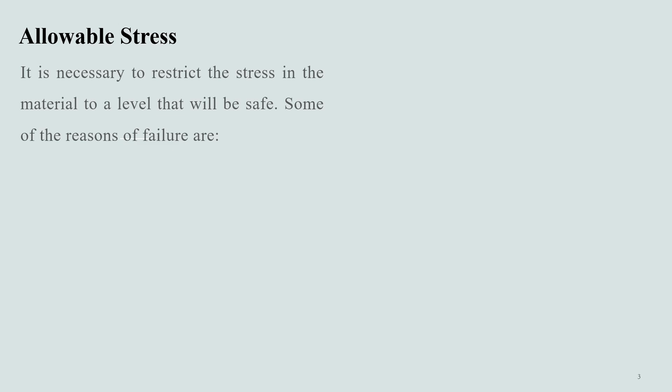There are many reasons for doing this. For example, one of the main reasons is fabrication errors. Most of the time, the fabricated or constructed member has a deviation in its measurements from the design measurements.

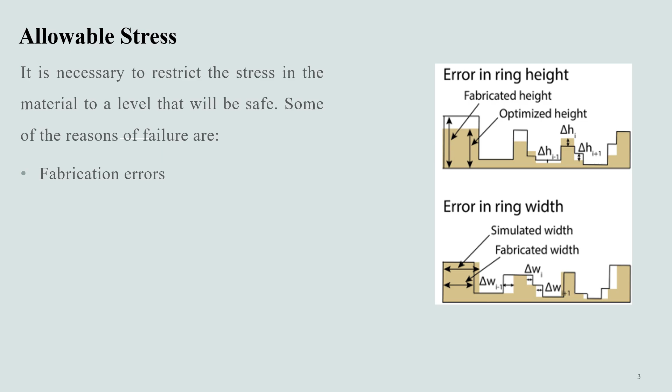Another reason for this is excessive loading. Obviously, we design for a particular load, but most of the time, the applied loading, especially on bridges or in road networks, is more than the load for which the structure has been designed. This is accounted for by using a factor of safety, which we will discuss in the coming slides.

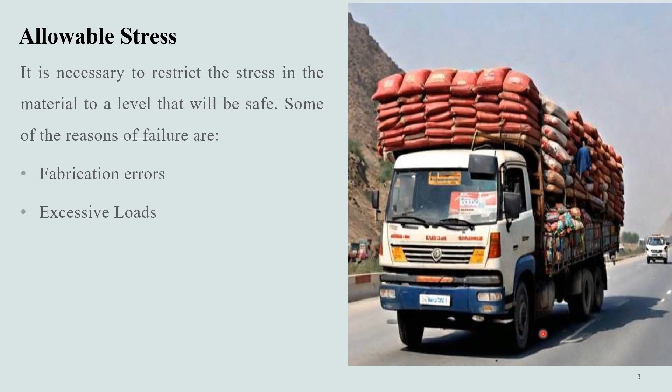Sometimes another reason to use this concept of allowable stresses is unanticipated loading. Any kind of impact, natural disasters such as floods, hurricanes, earthquakes, etc., can cause a huge amount of excessive loading than that for which the structure has already been designed.

Another main reason is the deterioration of structures due to weathering effects and the indigenous properties of concrete, which results in the loss of its strength and other mechanical properties.

One method of specifying the allowable load for a member is to use a number called the factor of safety. The factor of safety is the ratio of the failure load to the allowable load. The failure load is found from experimental testing of the material, and the factor of safety is selected based on experience, so that the above mentioned uncertainties are accounted for when the member is used under similar conditions of loading and geometry.

If the load applied to the member is linearly related to the stress developed within the member, as in the case of using normal stresses or shear stresses, then we can also express the factor of safety as the ratio of the normal failure stress to the normal allowable stress, or the ratio of the shear failure stress to the shear allowable stress.

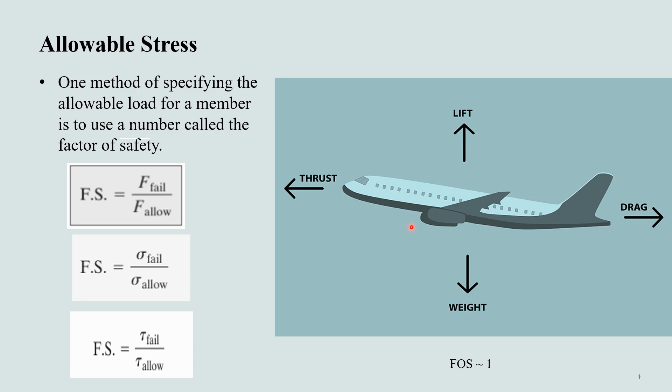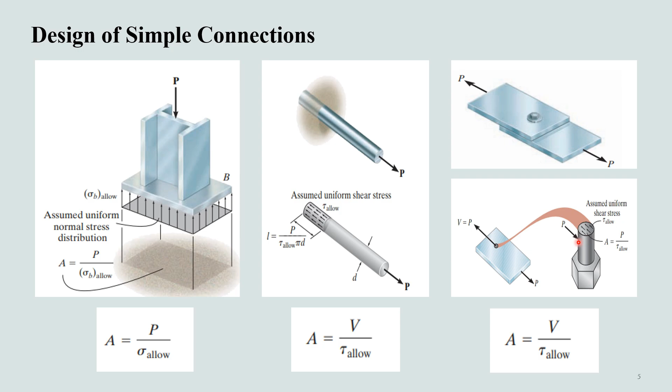When solving problems using the average normal and shear stress equations, careful consideration should first be made to choose the section over which the critical stress is acting. Once this section is determined, the member must then be designed to have a sufficient area at the section to resist the stress that acts on it.

This area is determined using the following steps. First, we need to determine the internal loading. For this, section the member through the area and draw a free body diagram of the segment of the member. The internal resultant force at the section is then determined using the equations of equilibrium.

After that, determine the required area using the equations which we have discussed in the previous slide, which are the normal load divided by the normal allowable stress, or the shear load divided by the shear allowable stress.

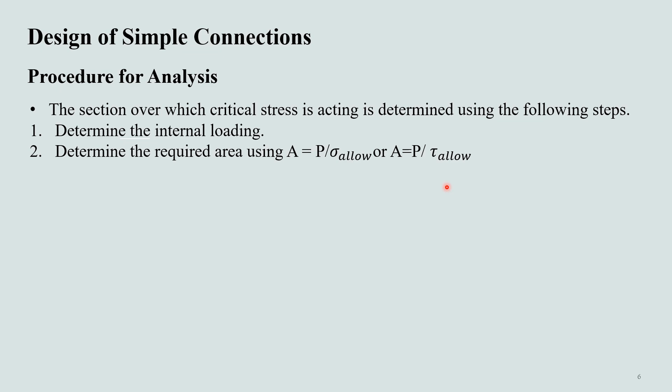This is our first example for the design of connections. In this example, we have been given an arm that is subjected to the loading shown in this figure. We have to determine the required diameter of the steel pin at C if the allowable shear stress for the steel is 8 ksi. So first, our first step should be to draw a free body diagram.

If we draw a free body diagram of this element, we find that we do not know how much force is being applied at this point, FAB, or the second support, and the first support is at C, which is actually an inclined support. Let me use a pen.

This was an inclined support here, but we know that using the principle of superposition, we can divide this inclined force into these two respective horizontal and vertical components. Why have we done so? Because it's usually much easier to work in this xy coordinate as compared to any kind of inclined coordinate.

Thus, we have this free body diagram, and using summation of forces and summation of moments, we are going to determine first the applied forces at point C, or the reaction forces at point C, to determine the diameter of the steel pin required to support this combination of forces.

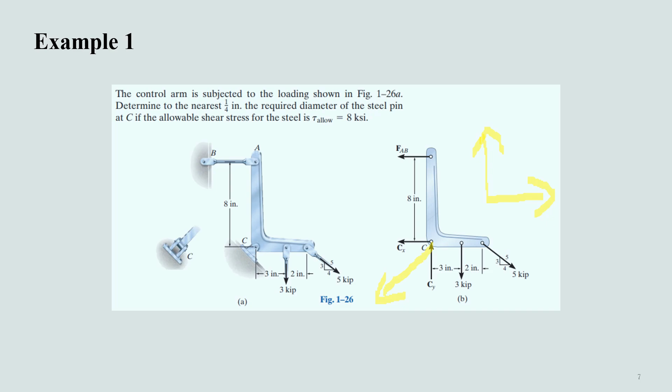Now, using this free body diagram, let's first apply the summation of moment at point C. If we apply summation of moment at point C, we can see that only the vertical component of this force of 5 kip will apply a moment at C. Along with this, a moment will be applied by force FAB and this force of 3 kip. Thus, taking anticlockwise moments as positive, the force FAB comes out as 3 kips.

Now, using the summation of forces in the x direction and the summation of forces in the y direction, we have determined the two unknown components of the force at point C, which come out as Cx equal to 1 kip and Cy equal to 6 kips. Using the concept of resultant forces, we can determine the resultant force at point C as 6.082 kips.

Now, if we closely look at this connection, we can determine that the pin at this location C is actually supported by two supports here. Thus, the total applied force of 6.082 kips is divided in half, and each face of this pin supports half of this applied force. Thus, if we need to determine the cross-sectional area, the applied force will be taken as half of this 6.082 kip.

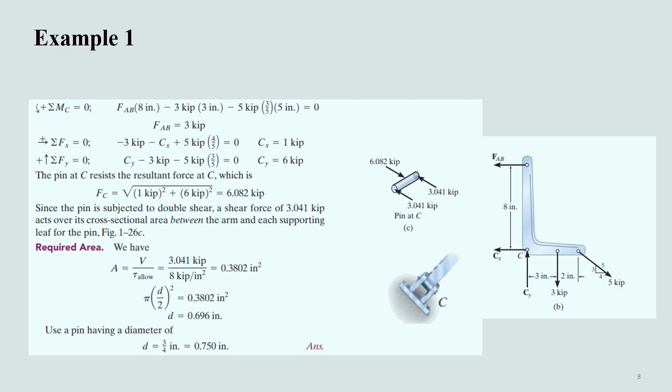If we take a closer look at this assembly, we can easily see that this rod is actually supporting a normal stress, and this disc will be subjected to shear stress. Thus, it's given to us that the allowable normal stress for the rod is 60 megapascal and the allowable shear stress for the disc is 35 megapascal.

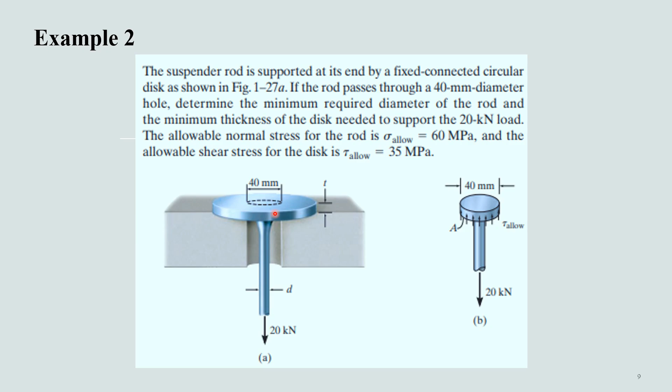In this case, determining the diameter of the rod is quite simple. We just need to use this equation in which we divide the applied load of 20 kN by the allowable normal stress in the rod, and equate it to this area here. Using this simple formulation we can determine the diameter of the rod.

However, in case of thickness of the disc, we closely need to evaluate the area that is being subjected to shear stress. Here we can see that this area can actually be determined by multiplying the thickness of the disc with the perimeter of the disc, because this small area where the shear stress is being shown is actually under the influence of the shear stress due to this applied force.

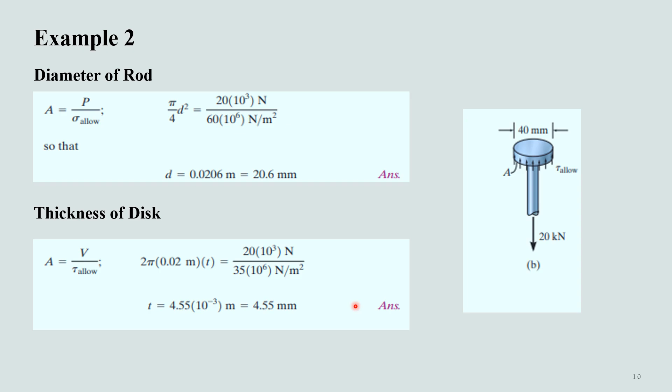Thus, the perimeter of the disc can be determined as 2 pi into radius, and to get the area of this region, we need to multiply it with the thickness, and equate it to the applied shear force divided by the allowable shear stress in the disc. Using this formulation, we have determined the required thickness of the disc, which comes out to be 4.55 millimeter.

We also need to keep in consideration that the pins at A and C are in single shear, not in double shear as in our previous example. We need to determine the largest load P that can be applied to the bar. This means first of all we need to consider the allowable stress for the aluminium, steel, and these pins based on their material as well as geometrical properties.

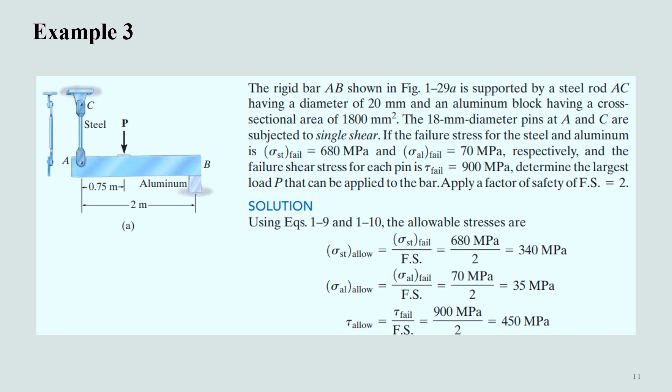So let's start our example. In the first step, we need to determine the allowable stress in steel, aluminium, and the shear of the pins. For this, we divide the failure stress by the factor of safety. This information has been provided in the given data of the example. This allowable stress for steel, aluminium, and shear comes out as 340, 35, and 450 megapascal respectively.

In the next step, we draw a free body diagram of the given rigid bar. It comes out as two forces, FAC and FB, which are the reaction forces as a result of this applied load P. Again, using the summation of moments, we can determine the relation between these applied forces. Taking moment at B, we come out with the relation between P and FAC, and taking moment at A, we can obtain the relation between the applied force P and the reaction at B. These are the two respective relations.

Next, we need to determine the value of P that creates the allowable stress in rod, block, and pins respectively. Thus, if we are considering rod AC, first we need to determine the allowable force in the rod AC. The allowable stress in the steel AC was 340 megapascal, and the diameter of rod AC has been given as 20 millimeter.

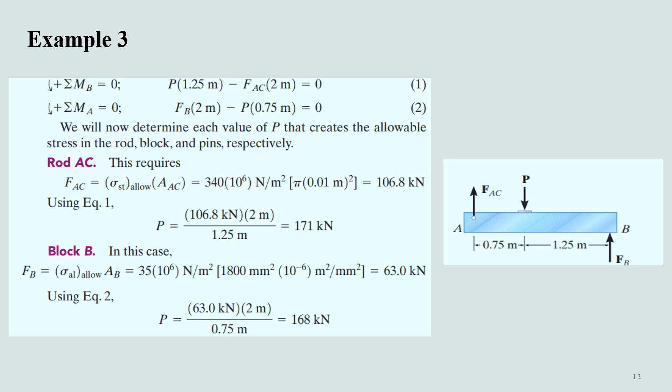So the obtained allowable force in AC is 106.8 kilonewton. Using equation 1, we have obtained that if we are considering rod AC, the applied force can be 171 kilonewton. Now similarly, we need to determine the allowable force that the aluminium block can support, and using the same analogy, it comes out as 63 kilonewton. Again, if we use equation 2, we obtain 168 kilonewton as the force that can be applied at this location P, or the value of P.

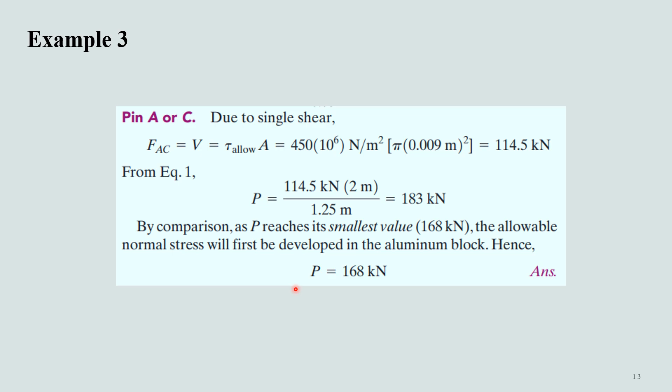So by comparison, as P reaches its smallest value of 168 kilonewton, the allowable normal stress will first be developed in the aluminium block. Thus, we need to limit P to 168 kilonewton if we want to avoid the failure of the aluminium block.

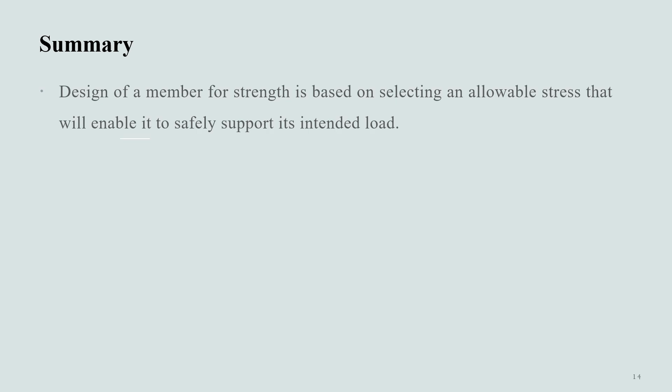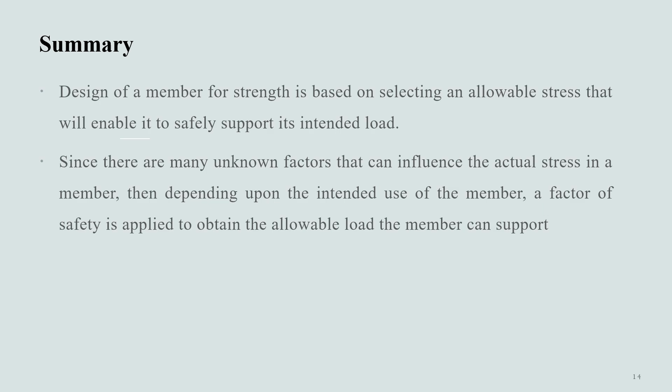If we summarize the lecture, what we have learned till now is that design of a member for strength is based on selecting an allowable stress that will enable it to safely support its intended load. Since there are many unknown factors that can influence the actual stress in a member, depending upon the intended use of the member, a factor of safety is applied to obtain the allowable load the member can support.